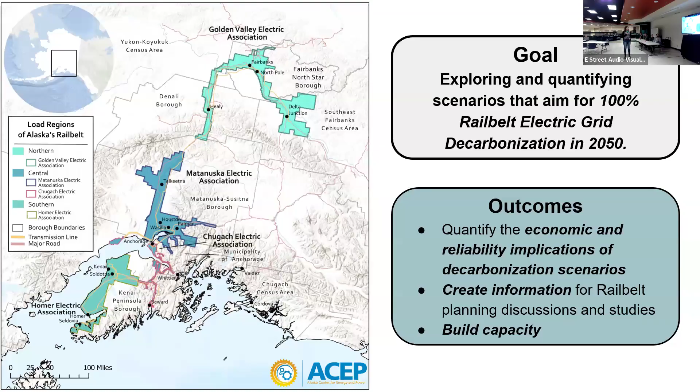This has been a large undertaking, and we have many people that have contributed to this project. We have the core ACEP team that's worked on this that are here today, and there's many others—I think it's like 15 to 20 plus people at ACEP that have touched this project in some way or the other. In addition, we've worked with 3 other organizations: Information Insights here today, working with us on public engagement, the Alaska Microgrid Group, and Telos Energy.

So Telos Energy—we're a small consulting engineering analytics firm, really focusing around renewable integration. We've done similar renewable integration decarbonization studies really across the country, working with developers, utilities, system operators, and researchers like Alaska ACEP. Really excited to be here.

Yeah, that's good. Thank you. One second.

In addition to the people that have been working on this project, we are very fortunate to have a technical advisory group. We've had engineers and managers, staff from each of the 4 electric co-ops—Golden Valley, Chugach, Matanuska, Homer—and also from the Alaska Energy Authority and the Railbelt Regional Corporation. We've been meeting with this group of people approximately every other week for an hour for almost 2 years. It's been a tremendous effort, and we're very grateful for all their involvement.

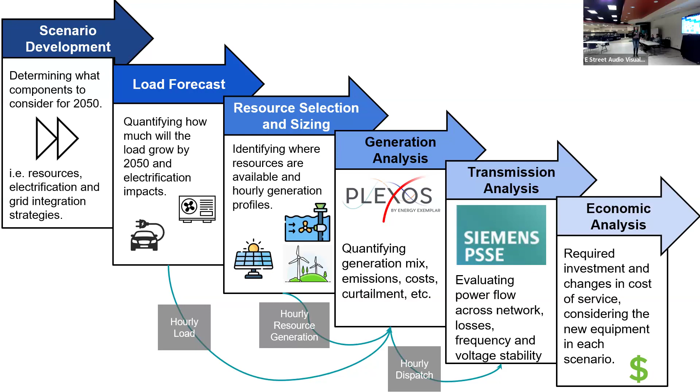We had 3 low carbon scenarios, each with the major technologies involved in the name: wind, solar, hydro; wind, solar, tidal; wind, solar, nuclear. In addition to these technologies, energy storage, battery energy storage, was involved in each of these scenarios. In particular, the hydro, tidal, and nuclear were meant to represent large investments in these technologies. They are not necessarily the most economical investment, but we really wanted to illustrate what the Railbelt would look like if these technologies were included.

And the load that was used for each of these scenarios is the same, including the business as usual. So when we look at the results, we're comparing scenarios that are really like apples to apples in terms of the system.

So in September of last year, we did a presentation on the load forecast. I encourage anyone who's interested more in the load forecast to revert to that presentation. There's also a paper, and these are available on the ACEP website.

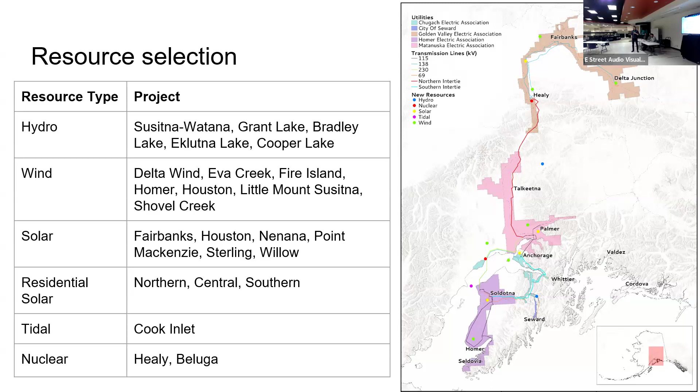So we identified projects to include in different scenarios, and then we tried to size the different projects for each scenario. Based on the input assumptions and the goal for the different scenarios, we tried to size all the different projects that went into those scenarios.

As we said earlier, some of the sizing was predetermined. The hydro, tidal, and transmission, that was determined when we developed the scenarios. We said, okay, so Sinawatana gets built as the large hydro project. So the sizing and projects for hydro, tidal, and transmission, in terms of what gets built and how big, was all determined in the development of the scenarios, based on previous studies that have been done, what's been proposed, and what we wanted to demonstrate in the different scenarios.

The remaining wind, solar, battery, nuclear, and fossil fuel, those remained to be sized. In fact, that's what we did in this part of the study, where we try to use cost.

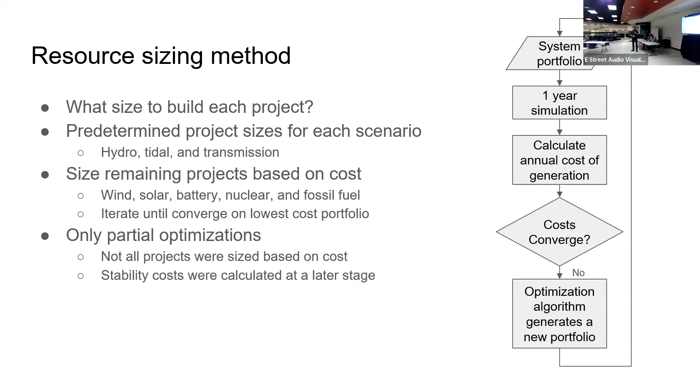The first is that wind and solar, with the cost projections we used, including in the sensitivity analysis where we looked into different cost projections, pretty consistently ended up being the cheapest sources of energy—with the caveat that the amount of load you could serve with wind and solar is economically limited, based on the cost of curtailment. Because once you start installing more and more, you're going to have to start curtailing more and more, even during the moments of high net generation. So essentially, economically, the amount of wind and solar built on the system is limited based on the cost of curtailment.

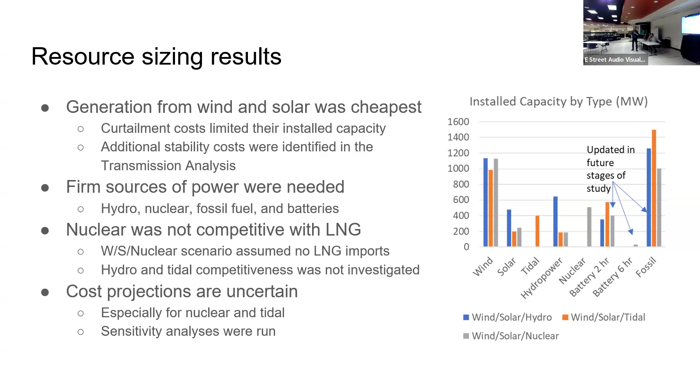And here we get to generation. All right, thank you, Jeremy.

The next step in the project is, it's great to look at the cost of the different resources and some different configurations of that, but really the next step we wanted to look at is: is this system operable? If we're going to move to a system with much more wind and solar and batteries, resources that are not always or uniformly available, we want to make sure that system is operable.

So the next step in the analysis was what we're calling the generation analysis. The questions we're trying to answer are really making sure the system works, not just at a really high level or on an annual basis, but on an hour-to-hour basis. When we think of the operators in the control room at the utility running the grid, we want to make sure it meets the reliability needs and all the operating constraints on the system.

So that's what we try to do in this step of the study, to take the role of the system operator and make sure they have the tools and the ability to run the system while meeting their reliability needs.

So questions we're trying to answer: how should these different resources be scheduled? How can the grid operator manage the variability? If it's windy one hour and not the next, how can they manage around that? Batteries, a very new technology in many parts of the world, how should those actually be controlled? When should you charge, when should you discharge? And how does power move across the network differently with a different resource mix?

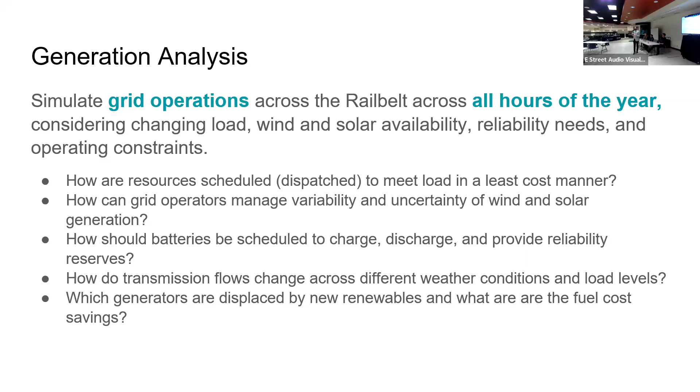So to do this, we go through a series of simulations called production cost simulations. The inputs we put into that are hourly load profiles, so the load on the system, how much consumers use electricity, will fluctuate hour by hour, season by season. That goes in. The wind and solar profiles are changing every hour of the year, so that's an input.

When we think about hydro, some months have more hydro available than others, there's a wet season and a dry season. We have our existing thermal resources, all the gas, coal, and oil on the system. Those plants are a little bit different, they have operating characteristics, limitations, different fuel prices, different heat rates going into them. So we bring in those constraints, and each of the three Railbelt utilities were great about sharing data on how their systems operate, so we try to reflect those realities, including operating reserve requirements, which is basically what happens if there's an emergency on the grid.

We need to make sure at any given time on the system, the power grid is able to respond to those emergencies. So we put that in, and then the transmission system. So those are all the inputs. We put that into a tool. We use a tool called Plexos.

This is an industry recognized tool used by a lot of utilities and system operators to plan out the system. And it goes through and says for every hour of the year across all 8,760 hours, what's the least cost way I can schedule all my resources while serving load and meeting all the reliability obligations.

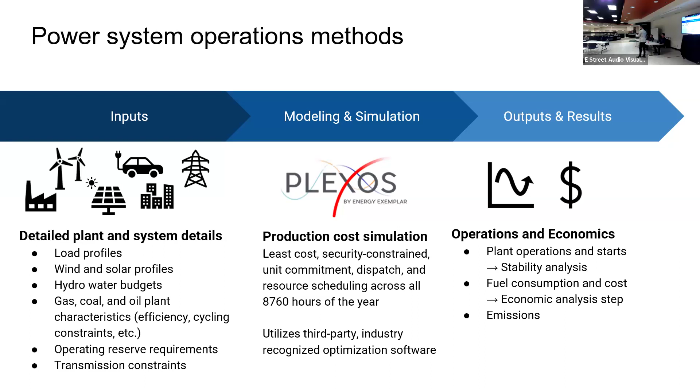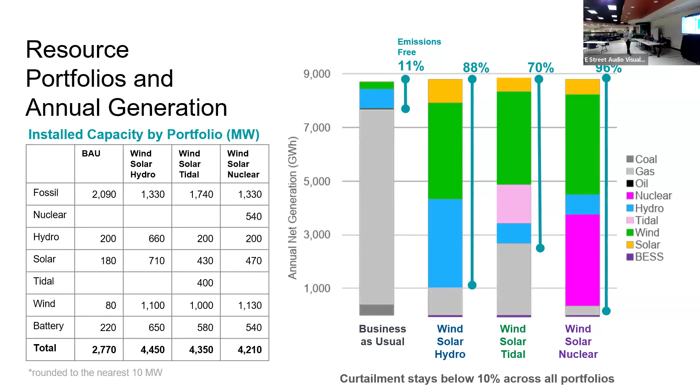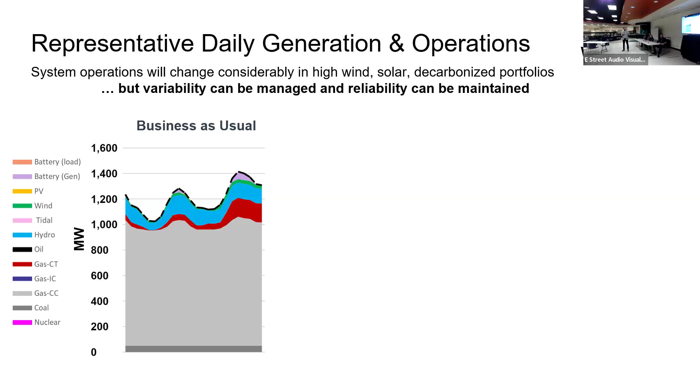And you can see in this business as usual scenario, the gas is following a very predictable pattern, following that load pattern. And then at the top, the red, these are what's called a peaking resource, a little bit more expensive to run, but they're very quick to start and stop. And then the hydro is smoothing out the peaks at the top.

When we step forward to some of these other portfolios, you start to see that dispatch change quite a bit. The big thing is the fossil units, the gas units, because they're more expensive to run on an hour-by-hour basis, higher fuel costs, they're dispatched down to a lower loading level. The renewables are really displacing that.

You're also seeing a lot of movement. So the chart on the left is very smooth, predictable across the day. You're starting to see that variability kick up and things are moving around quite a bit. And so that's what we're trying to evaluate here, is making sure that system is still operable.

With that, you can also see the battery storage charging during the high renewable periods. And then in this evening peak, you're starting to see it discharge. So again, that's what we're trying to do, is step through these scenarios, make sure the system is operable on an hour-by-hour basis. And so that's what it looks like without the hydro. And then again, with the nuclear, running base load there at the bottom, and then everything moving around that.

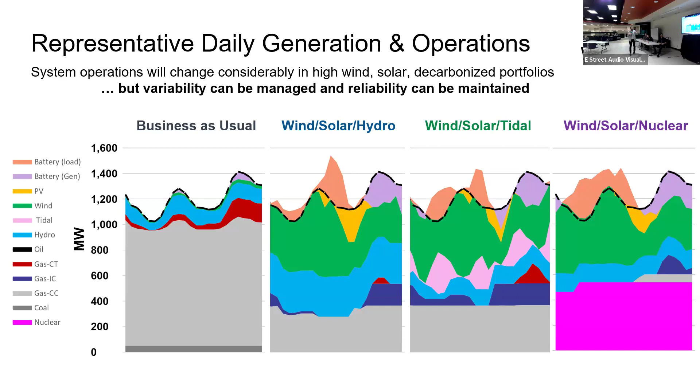And so we're going through that process, not just for one day, but we also use this to select specific hours. And I'll pass this over soon to Matt, and he'll talk about how we look at some of these individual hours in a lot more detail for the transmission stability.

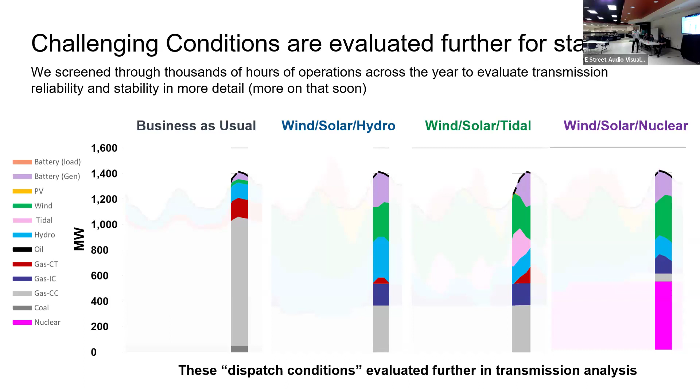Matt's going to talk about these dispatch conditions that get evaluated more in stability analysis. And so I want to show how we zoom in on particular periods, and we're going to look at those in more detail. We're not just doing this for a single day, we're doing this for every day of the year.

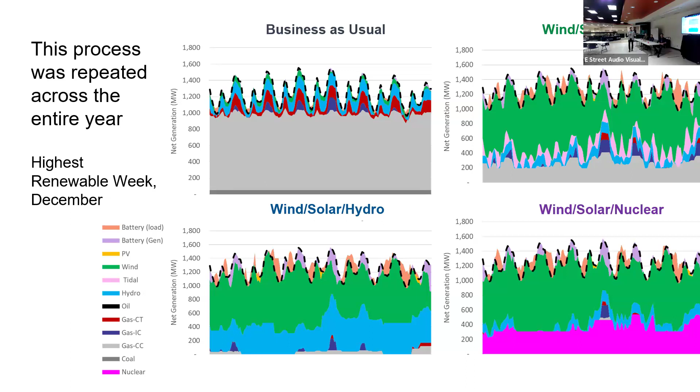What that gives us is this timing of wind and solar generation is going to vary considerably across the year. So when we talk about some of these portfolios being 50% wind and solar, it's not 50% wind and solar all year. It's going to operate across an entire range.

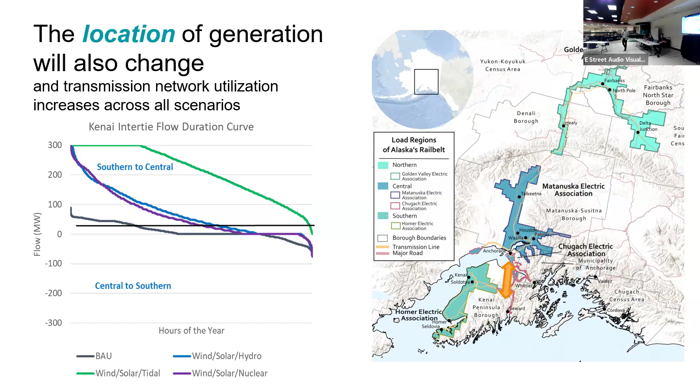So again, timing of generation is stuff we have to really think about, also the location. Both of those are going to segue well into the next step, which is the transmission analysis.

All right, thanks for the setup, Derek.

To begin the transmission analysis discussion, I'll talk a little bit about what is it - what are we analyzing to make sure that these scenarios can actually work and can be stable, and that if something happens on the grid that is unexpected, can the system recover from that successfully the way we would expect it to and keep on running and keep the lights on?

There are 2 big aspects of how we talk about continuing to operate. One is steady state analysis, and the other is called dynamics analysis. In steady state, we're looking at whether the grid can sustain the operations it's under in all credible grid conditions. In power systems engineering, that means your N-1, or the loss of any element with no forewarning that it's going to happen. If you lose any element on the system, can you keep going?

As part of that, there's the thermal analysis, which is looking for basically the power carrying capacity of the lines. And then there's the voltage analysis, or voltage violations, which you could have to ensure that you have enough support of the voltage to keep all of the voltages across the system in their normal operating conditions.

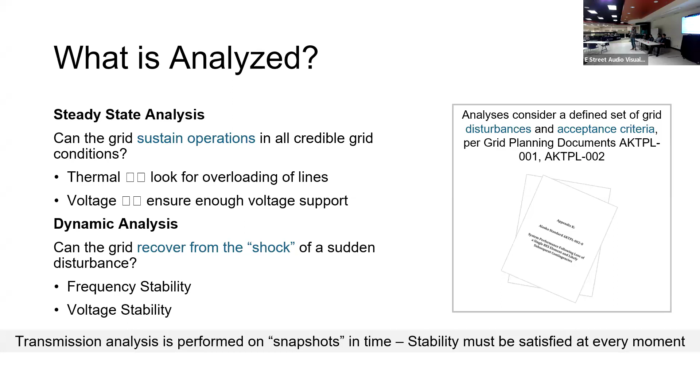These analyses are performed as snapshots in time. As Derek mentioned, we really care about how the grid operates over the course of the year, but we can't study a year's worth of operations at this level of detail. So what we do is choose specific points in time that are particularly challenging to understand - if it can survive that, it can survive all of the others.

The challenges we're talking about in steady state have been touched on before. There's a lot of new resources, retirements, and they're in different locations, which means the transmission system is delivering from source to loads in different ways. It's being utilized differently - different lines are carrying the power in different paths than what we may be accustomed to in other scenarios or how it works today.

In dynamics, what we're considering as challenges is a sudden loss of a power plant. That sudden loss of generation, if it happens, has to be made up for very quickly in order for the system to keep on running.

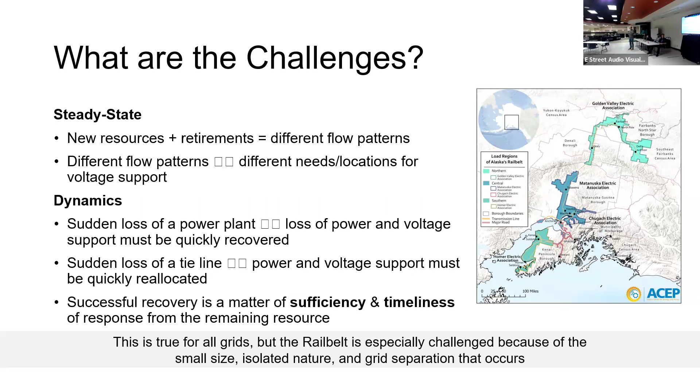Also a loss of a tie line, in particular the major tie lines being the Alaska tie line between central and north, and the Kenai tie line between the south and central region. When that happens, you're necessarily separating the system - the Railbelt comes apart into two pieces, and then are those two pieces independently viable? To ensure that, essentially you need a response from all of the collective remaining resources. You need enough response, and you need to deliver that response in time for it to be effective.

So when we look at the grid, we've been talking about hydro and fossil and wind and solar. When I look at it, I see two things: synchronous machines - that technology of how a resource delivers power to the grid - and inverter-based resources, the other major way power is delivered to the grid. Synchronous machinery has dominated all of the conventional technology: fossil, nuclear, hydro. Inverter-based resources are how wind, solar, battery, and tidal resources interface with the grid.

Those synchronous machines, those large rotating masses of steel and copper, the behavior and response you get from them is determined basically by their physical geometries. So it's predetermined in a sense up front in the design of that equipment. You put it on, you know what it's going to do in these disturbances, or you can represent it very well.

With inverter-based resource technologies, these are essentially software defined. They're like computers controlling what is happening to the grid in real time, moment to moment. So what they do depends on that software that is running. That's great in the sense that there's a tremendous amount of flexibility to respond and provide really good stabilizing behavior. There's also the corollary - there's the ability to get it wrong and to provide the wrong behaviors and do the wrong thing at the wrong time if it's not done properly.

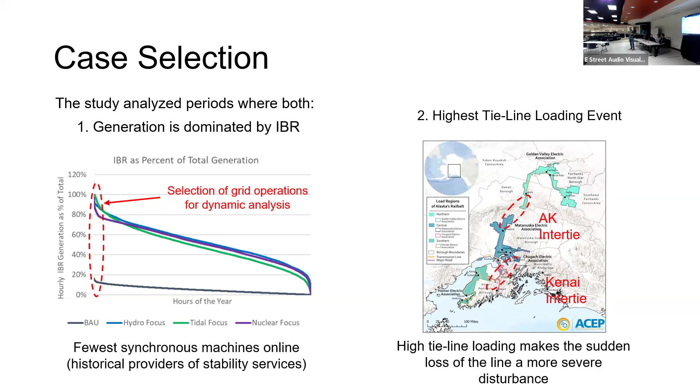Briefly, on the steady state analysis, we identified both thermal and voltage violations. For thermal violations, some lines were overloaded due to different flow patterns on the grid. We proposed upgrading the system through a combination of new lines as well as reconductoring - basically leaving the poles in place and replacing the wires with a larger wire size to carry more power. On the voltage side, we found that in many contingency cases the voltage would drop, indicating a lack of voltage support for that condition.

The voltage was dropping in part because two things have been assumed. One, the system is now supporting more load - because of electrification and electric vehicles coming online, there's more demand for power, and the transmission system is carrying more power. When it does that, it increases the demand for supporting the voltage. To address that, there are a number of different approaches, some very simple and some more complex and equipment-intensive, for providing additional voltage support to continue operation in those conditions.

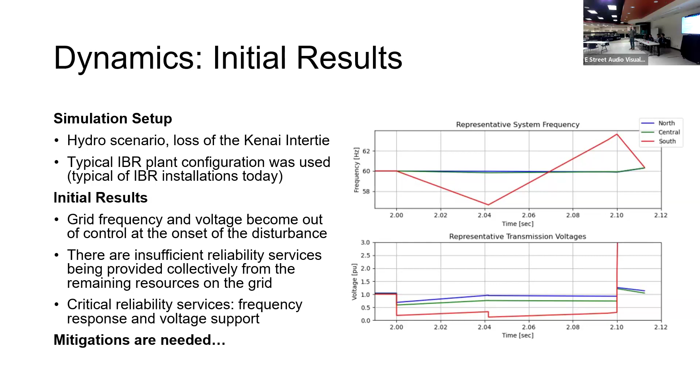This is with our initial representation of the wind and solar, those inverter-based plants, as they're typically being commissioned today. Just the normal responses that work today with relatively low penetrations of renewables would give a result where the system in this stressed condition would basically come apart immediately.

So we said, okay, there's clearly a problem here - what are the mitigation approaches you can take? We categorized these into a few. One, there's an operational approach to mitigation, meaning you can force on some of the conventional technology, those synchronous machines, to stay on and provide those services. That can work well for small periods of time where you don't have a lot of hours of operation doing that. But if you're going to operate for a third, a half, or a majority of the year with high levels of renewables, you would prefer not to - it would be uneconomic to force those generally fossil-fired plants online and curtail the renewables. So that's a mitigation we were not pursuing here, although it is possible, so we included it.

The other option is the capital investment mitigation. Without going into too much detail, you could utilize synchronous condensers or convert existing plants to synchronous condensers. A synchronous condenser is essentially the rotating machine part, the generator part of a power plant, without the turbine part of it.

And so it doesn't burn fuel, it doesn't produce energy for the grid, but it does have the generator retained as connected to the grid and providing services for it that can support voltage and help control frequency.

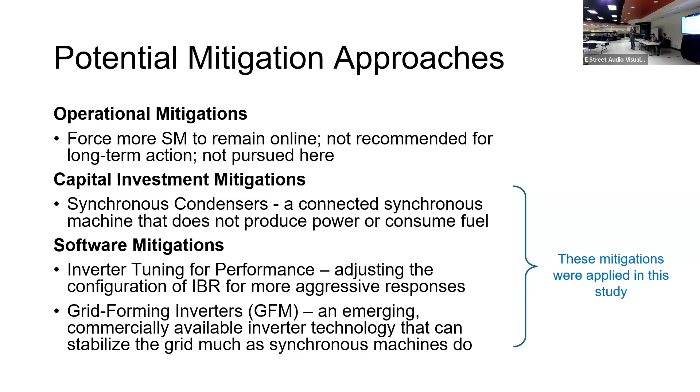And then there's another control paradigm, which I'm going to refer to as grid forming inverters. This is a new emerging technology in the industry that basically takes some of the best of both worlds from the two different technologies. I'll get into that in a little bit more.

And then when you go to the grid forming inverter technology, this new control paradigm, you see that you can keep it stable. And in many cases, there's no need for synchronous condensers at all. So overall, the system has much better stabilizing characteristics.

So if you contrast this case with the loss of the tie, you see that the two systems, in blue and red, the north and the south, the frequency goes very high, and then actually it ultimately collapses. And same with voltage, it's ultimately uncontrolled.

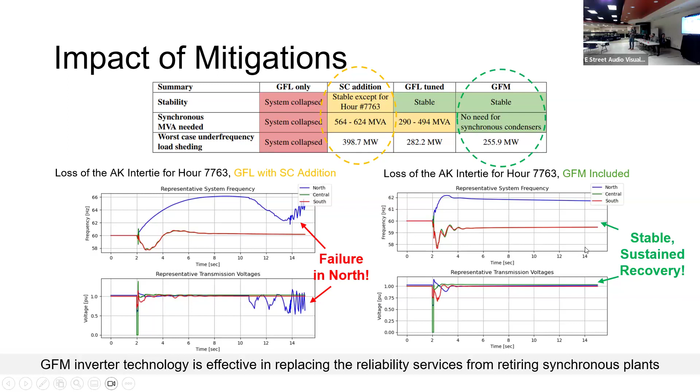In contrast, with the use of the grid forming technology, if you have enough of that on, you see the responses are pretty well damped. And after about a second, they recover to a new steady state and continue. That's what a successful recovery looks like to us.

And so the grid forming inverter technology, this new emerging technology, is an important finding in that it can actually enable stable operations in these scenarios where we're really pushing the system very hard. It looks very different from how the Railbelt is being operated today. There's a lot more I'd love to talk about, but I'll keep it very brief here and now.

Essentially, what it is doing is you're writing software in a way that you are capturing the desirable and stabilizing behaviors and characteristics from synchronous machinery in the short time frames, and you're also capturing the benefits of the stabilizing characteristics of conventional inverter technology in the slightly longer timeframes, where each of them have a strength. And if you can pull the best of both worlds and wrap them into kind of a new product, that's what we're calling grid forming inverter technology.

And so we've gotten a lot of questions. Okay, this is great, you've got this magic thing here, how is it being utilized? Is there any experience? And there is. It's growing. There are a number of projects that are actual real world projects made by real equipment manufacturers that have been installed now for about the past 6 or so years. This list is incomplete. It's growing all of the time.

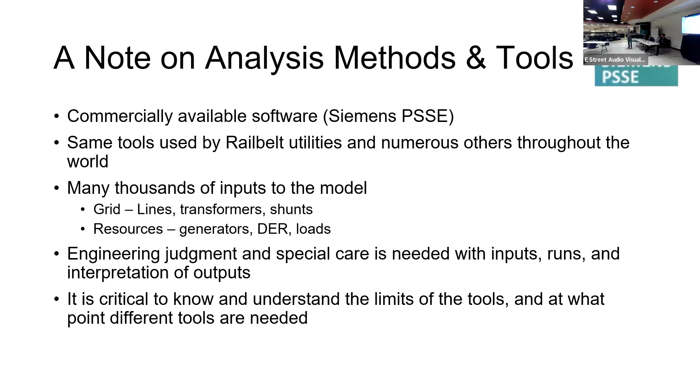There are literally thousands of inputs to this. Conditioning it, understanding the results, it takes a lot of judgment and time and specialized skill. And the ACEP team has done a great job of that, working through that. So as we get into the economics phase, I'll pass it off to Steve, but just wanted to share a little bit about the process that we've gone through in sharing these results.

What it's saying is we started with an initial resource sizing, and we ran the generation analysis. We found some operational constraints in terms of how the system is working. So we would add, for instance, battery energy storage to help smooth some of the variability. And then we would go to the transmission analysis, and we would find, okay, that didn't quite work. We needed some more stability on the system. So we would add, in many cases, a basket of stabilizing technologies, including battery energy storage.

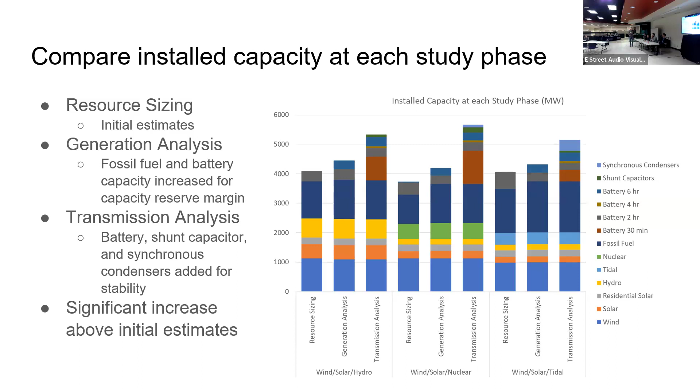So let me hand it off to Steve to talk more about the costs.

Thanks, Matt. Which is the flashlight? The middle? Top. Okay.

So now that we've come all this way, and for us, it's been a 2-year journey, it's really fair to say that what I'm going to talk about really is just arithmetic at this point. And the real economic analysis, which has been limited by design, has already been embedded somewhat in Jeremy's work. He did a lot of work writing software to try to come up with, let's call them economically sensible resource portfolios. Perhaps not optimal, but way better than if we had just thrown darts.

And similarly, the work that we've labeled generation analysis with the Plexos tool, that's actually a highly sophisticated optimizing algorithm that's trying to find out the least cost way of running the system that you give it. So really, there has been a lot of economic analysis and attempts to optimize to some degree the system along the way. And what I'm going to just do as a wrap up is really arithmetic. It could be called accounting, but we're just going to add up the costs that have been accumulating with all these resources.

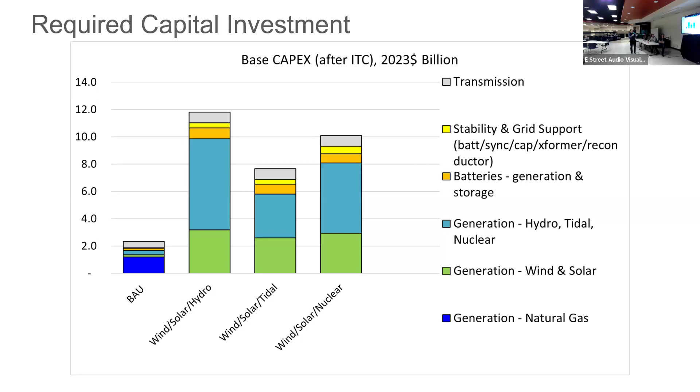I don't know if this slide is worth going into, but you can go and double check what we tallied up. When we tallied up, we tried to tally what would the cost of service be, and I deliberately restricted that cost to be basically the cost of generation and transmission, getting the power produced, getting it shipped to the distribution system.

We didn't get into the weeds of how the distribution system might change. It might cost less to run the distribution system if you double the load and you can more effectively use your distribution assets. We didn't go there. So this is what we call the G&T, or generation and transmission cost of service, that we're going to look at right now.

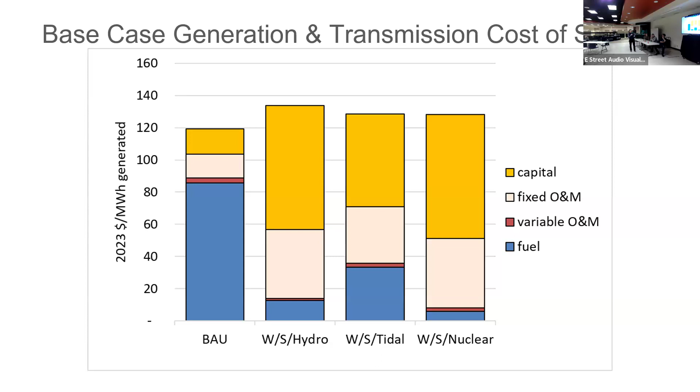So the last thing to show you here is a bunch of sensitivity cases that we ran. There's 5 of them. We'll go through them pretty quickly, just to explore what happens if you vary some of the things that we know are highly uncertain. So here we go, 5 comparisons.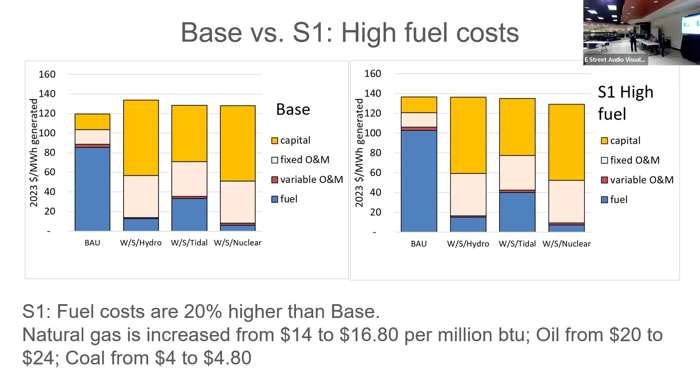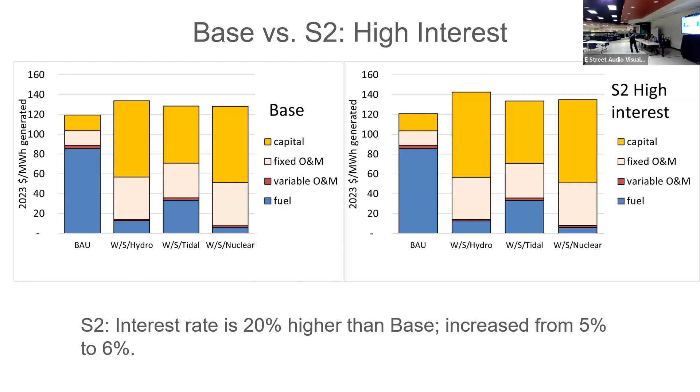On the other hand, what if interest rates were 20% higher? Well, it's kind of predictable there that the capital intensive renewables are going to do worse, and they're going to look significantly more expensive than the BAU, the fuel intensive BAU. Then we said, well, what if the interest rate is high and we underestimate the capital costs of these big projects? Well, then things look even worse for the renewables relative to a BAU setup.

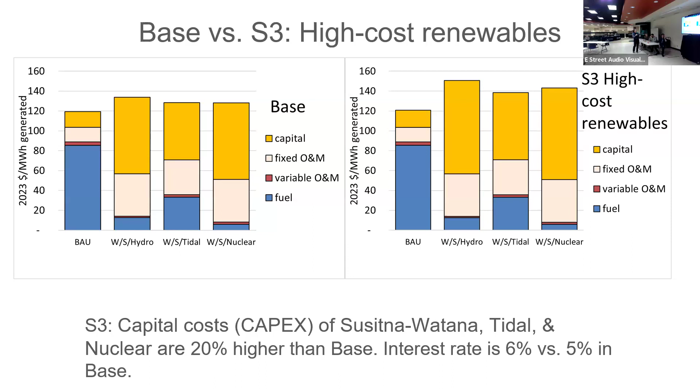Conversely, what if we are too pessimistic about the cost of some of these big projects? Maybe technological progress will give us much lower cost than we have today. We know that has been the pattern for some wind and solar resources, but we did not project continuing technological learning curve advances beyond 2030 in our costing of wind and solar. So if you apply a 20% drop in the big projects and consider maybe a lower interest rate, once again the renewables look better, but they still all kind of look relatively similar.

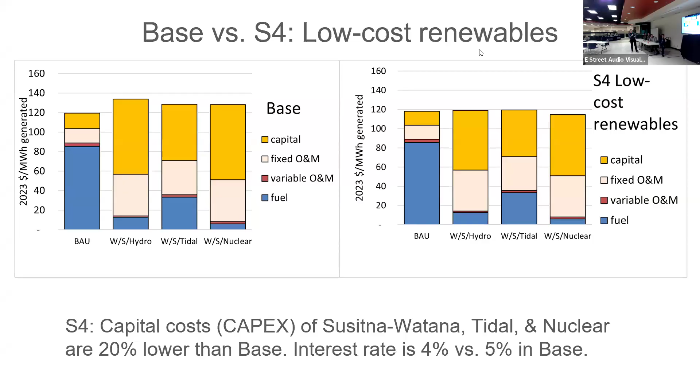Okay, I might have frozen. Maybe I'm not pointing in the right place. I'd like to advance my slide. Maybe you can just do it.

Okay, so we have advanced to the last sensitivity case. This is one where we make the assumption that all of these projects could get not a 30% ITC, but a 50% ITC, by taking advantage of the so-called bonus credits for domestic content and being situated in what the Inflation Reduction Act calls an energy community. So with a 50% ITC, once again the capital intensive portfolios look, in some cases, significantly less expensive than the base.

So those are 5 sensitivity cases. Come on. Oh, good, thank you.

And I have a very simple-minded takeaway from all of these sensitivity cases. Obviously you can't read them on the screen, but you can find them in the report or on the slide deck. The bottom line is that the most favorable case for low-carbon resources is a 50% ITC, heavily capital intensive nuclear scenario, 9% below the BAU. Conversely, if things go badly for renewables and capital investment, the highest change you get from sensitivities is to be 25% above the BAU. So it's sort of like a -10 to +20 kind of range.

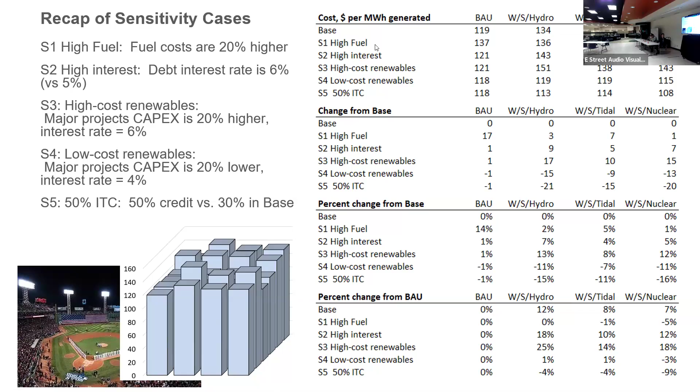All right, so we're wrapping up here. We've thrown a lot of information and a lot of numbers at you. What I'd like us to focus on, instead of the individual numbers that you'll see here, is really the challenges and the opportunities that we've identified. I think this is where the key takeaways are.

So in general, the low carbon scenarios represent a very different operating scheme than what we have today, or in a business as usual scenario where we are largely dependent on synchronous machines. This would be a significant change to the rail belt, and this type of change does not happen overnight. These are incremental changes that will happen over time.

We are talking about 2050. The system stability is going to be more difficult to achieve in these low carbon scenarios. Improvements in inverter technology of batteries, such as grid forming inverters, and wind and solar energy are really essential to having a stable railbelt grid in a low carbon scenario.

As Steve has mentioned, there's great uncertainty in all of these future costs, 27 years into the future. And from these sensitivities we've identified, the cost of service of the low carbon scenarios differs anywhere from -9 to greater than 25% than the business as usual.

We'd also really like to note that the study did not evaluate the cost effectiveness of near-term renewables. We did not look at 5, 10, 15 years into the future. The cumulative cost of achieving these higher and greater levels of renewable penetration are not linear. You know, you kind of have step changes where you need to add, say, more transmission or certain types of equipment as you get to higher and higher levels.

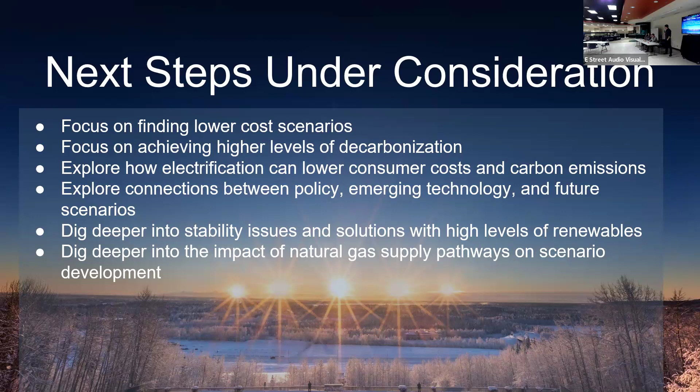So these are some of the different things we're considering, and we're definitely open and would love to hear other ideas. Later today we'll have a poll asking for input on these. So now I think we're opening it up to questions.